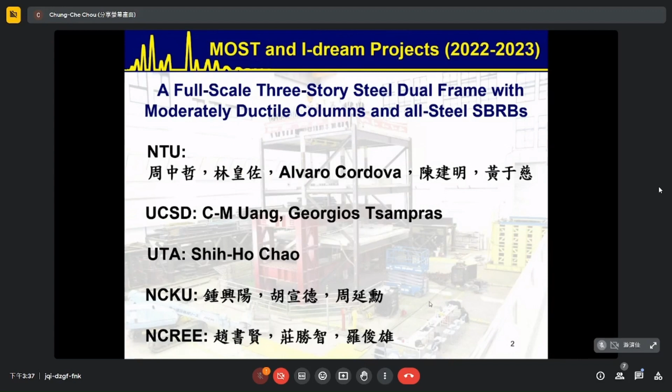Because if you are familiar with the AISC seismic provision, which is a US code on steel, they have the 2016 version and also the 2022 version. Particularly, we are looking at the changes for the column. For example, in 2016 it requires the column B/T ratio. In Taiwan, we are using the rectangular column, so the column has a width and a thickness.

So in the code, it requires a minimum width-thickness ratio to meet the highly ductile member requirement. What does that mean, highly ductile member? That means when the building is under earthquake, this member will go through very significant inelastic deformation. We call it a highly ductile member.

But how about the moderately ductile member? That means in a very strong earthquake, it only gets very minor inelastic deformation. So you can see this B/T ratio is almost doubled.

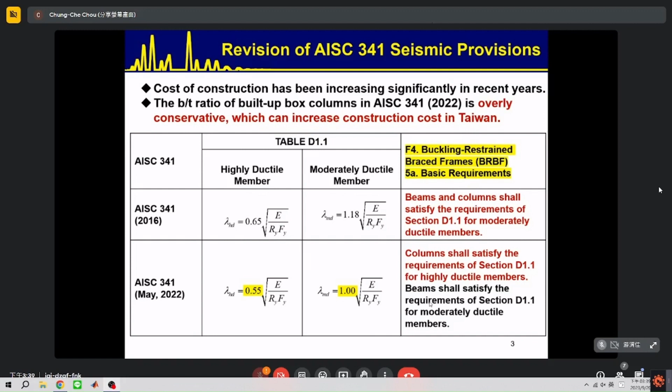But in the 2016 to 2022 version, it's become more stringent. Particularly in the older version, it requires that we can use a beam and column satisfying only the moderate ductile member requirement. But for the 22 version, the beam and column should be designed by this, not by this. So you can see the value reduced by half.

That means your thickness will be doubled if we follow this new version of AISC seismic provisions. So this is very strict and over-conservative. So I did this research to talk about this.

In order to do this, we basically designed a three-story frame with one special moment frame and the other a buckling restrained brace frame. So you can see this b/t ratio based on Young's modulus and material strength gives 22 for the moderate ductile member, and our column basically satisfies this. b/t is very close to the requirement of a moderate ductile member.

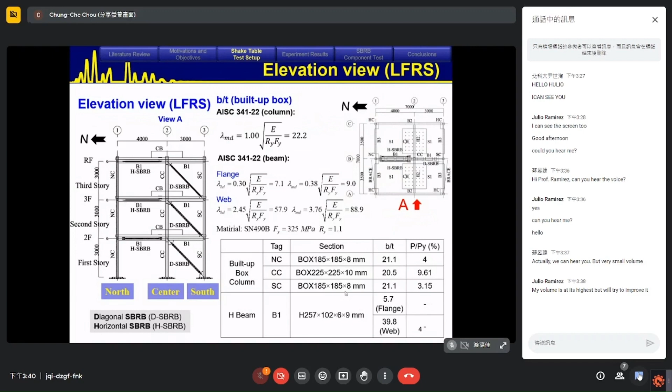But as you know, Taiwan is in a high seismic area. Basically we should follow the stricter requirement. But in this case, we try to use this less ductile column to see how it performs in shaking table testing, because that's a BRB, the buckling restrained brace frame.

So this is one of the BRBs we used in our testing. Basically we have what we call the core, the center core, to take the actual force. But as you know, when the plate is under compression, it's very easy to buckle, right? So we put the so-called restraining member, that's all the blue part, and use bolts to sandwich them together. So this is how we do it.

Usually, in a very popular way, they put concrete inside in order to get more rigidity. But in our case, we use pure steel without putting any concrete inside. So that can save about 50% of the construction labor and also save a lot of money.

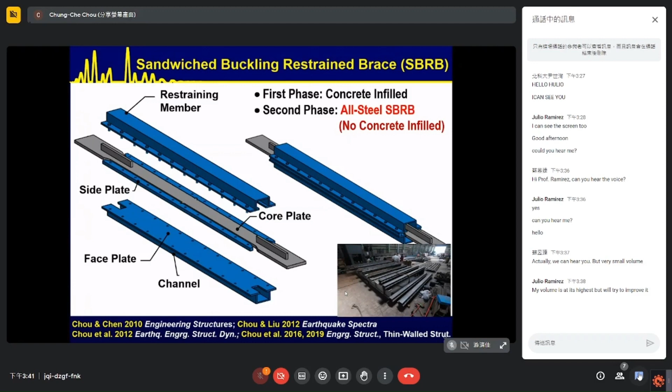So this is one of the testing we conducted. You can see we have a 15-meter high reaction wall in our Taipei lab, with 5 actuators, each one with 1,000 kilonewton capacity. So we put the SBRB over here.

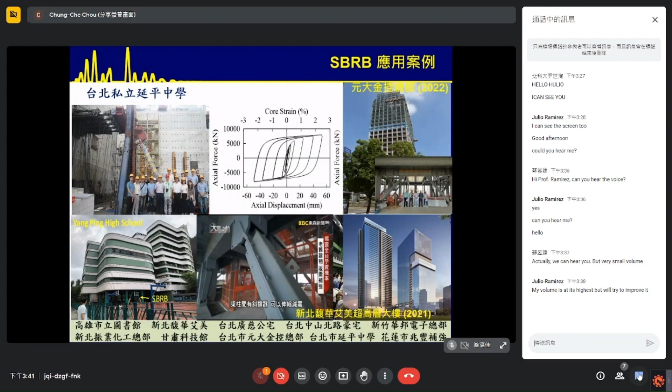This shows the axial force versus axial displacement response. It's very stable up to 2.5% axial strain, that's about the maximum considered earthquake level in Taiwan. So this has been used in many buildings.

For example, one probably just 10 minutes away from here, this is a bank headquarters, and this is Yanping High School, also about 10 minutes' drive from here along Jianguo Nanlu.

And there is also the highest building in New Taipei City, a 45-story residential building. They use more than 800 SBRBs for seismic resistance.

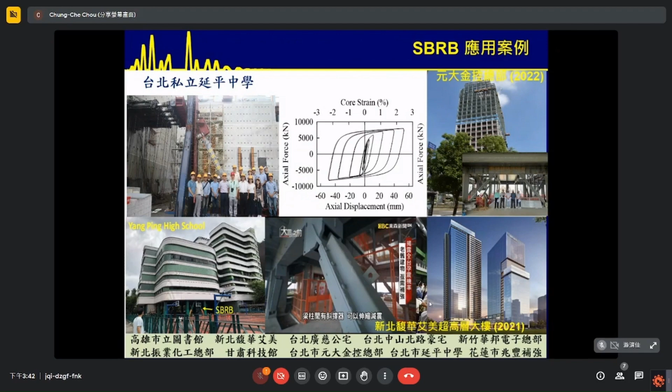So this is one of the testings for this high-rise building. You can see this is without filling any concrete. So under tension and compression, you can see here, the member performs very well. It reaches a capacity of 7,000 kilonewtons in compression and 6,500 kilonewtons in tension. So the performance is very stable.

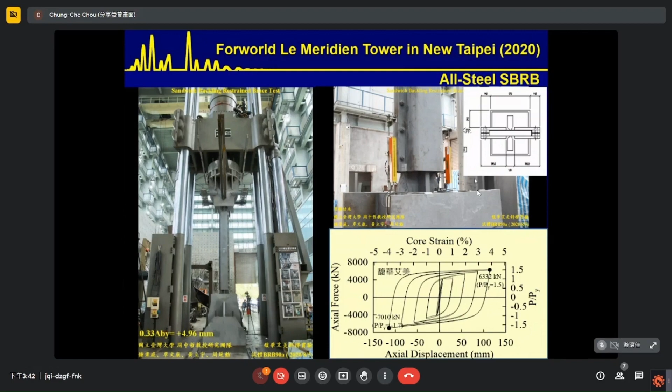In addition to that, this is one retrofit project. This is a very old building, 30 years old, located on the eastern part of Taiwan, in the Hualien, Taitung area, the most beautiful area in Taiwan. So if you have a chance, please take time to visit the east coast of Taiwan.

In addition to SBRB, we also use our research funding to develop a different type of brace. This is one of the largest braces we are testing. If you look at this force deformation relationship, it's totally different than the BRB because there is no force deformation in these two corners. So we call this the self-centering brace.

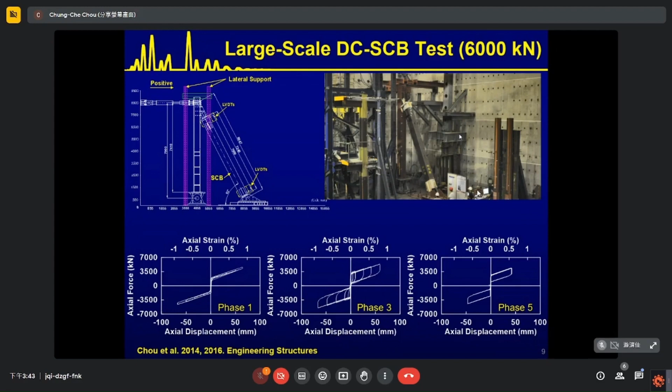It means when the loading is unloaded back to here, it has no residual deformation. So this brace can provide energy dissipation and also reduce the residual deformation to a structure. This one is without an energy dissipation device, and this one is with an energy dissipation device. That's what we are testing in our Taipei lab.

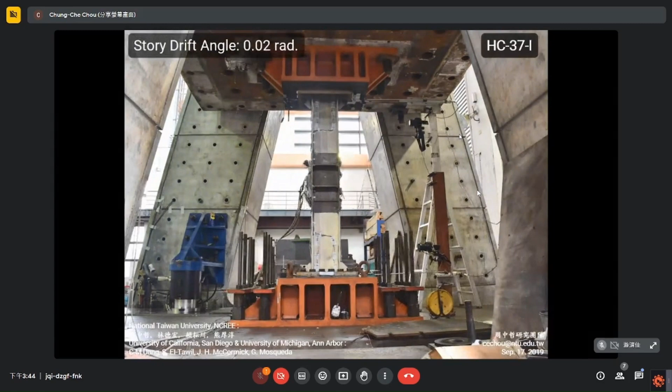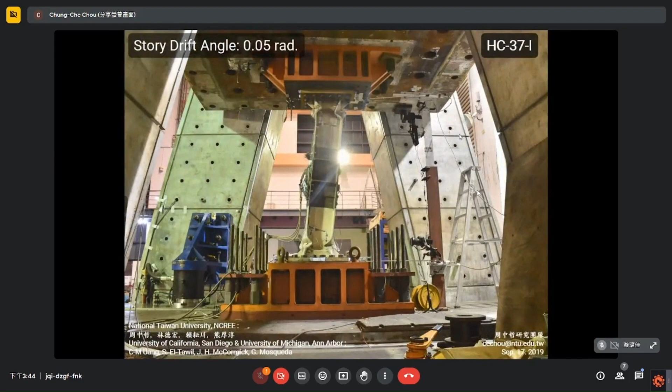In addition, in our Taipei lab we have a MATS facility. In this case we test the column, so we can apply more than 10,000 kilonewton axial load. We also have a horizontal actuator to apply 4,000 kilonewton capacity. So during the axial load and the lateral load, you will see the buckling and shortening of the column in this facility in the Taipei lab, which we call the MATS.

So that's the current single column testing. But as you know, the column is connected to the second floor beam and also the second story column. In this particular collaboration between UC San Diego, Michigan, Ann Arbor, we are trying to incorporate the boundary condition between the beam and the column to simulate the real boundary condition in the building.

So we take this portion, this is the column, second story beam, and third story beam. We put the lateral support to make sure the beam does not have lateral torsional buckling. This is our actuator, placed here, here, and also here. So we use three actuators to do this very complicated testing. I think this is the first very complicated testing for the column to simulate the real boundary condition in the building.

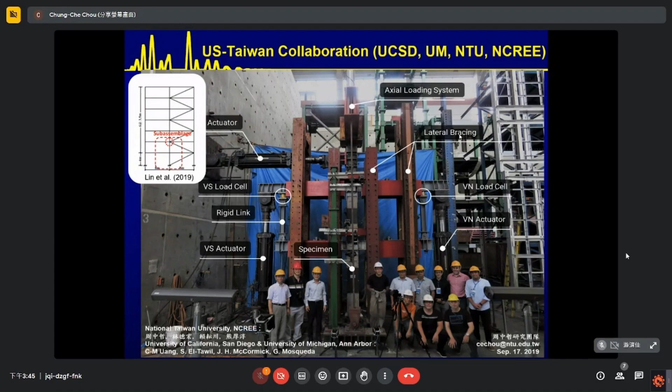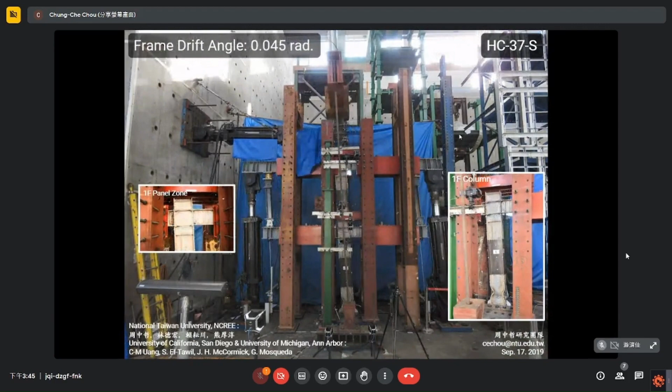Let me show you one of the videos here. If you look here, we also apply the axial load, then we apply the lateral load. During this moment of axial load, you will see the buckling here. Once the buckling occurs, the column will shorten, so these two actuators need to follow the shortening of the center column to make sure all the axial force can go through the center column. That's how we conduct this testing in the lab with UC San Diego, Michigan, Ann Arbor.

That's all the facilities in our Taipei lab. In the Tainan lab, we have one big shaking table in Taiwan. The table dimension is 8 meters by 8 meters, and the payload capacity is 200 tons, which means we can put a 3-story full scale building model on it.

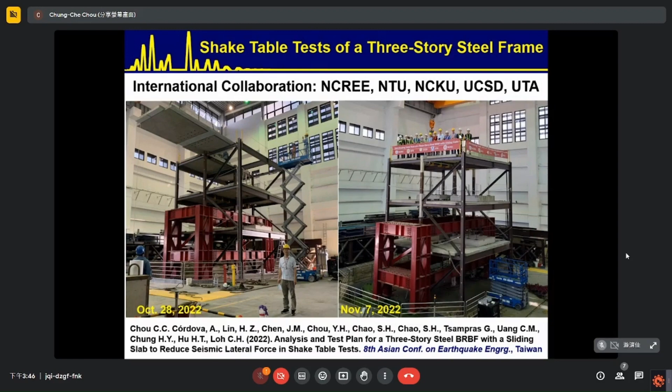As you can see here, this is a steel dual frame system, and in this particular case we try to use a precast slab. Basically the slab is manufactured in the shop, then we just use the energy dissipation device to tie the slab to the building frame in order to speed up construction at the site. That's how we try to investigate the behavior of this precast slab on the building performance.

So this is how we construct this 3-story, 9-meter high frame in the lab. This is our shaking table, and this is our frame. The center frame takes the earthquake resistance, so we assemble everything here at 9 meters high. Then we put the perimeter frame there, then we put the first story slab, second story slab, and the roof, and we put the concrete mass over there.

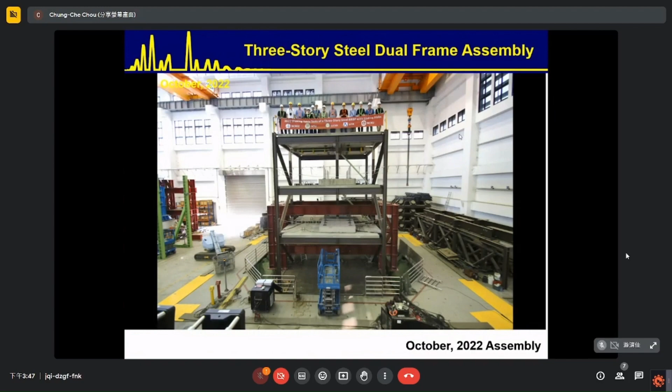During this testing we try to only input one directional loading. For this particular loading, we use the ground motion we recorded from last year's Chihshang earthquake. If you read the news, there was a big earthquake on the east coast of Taiwan, magnitude 6.4. On the first day the epicenter was over here, then on the second day, less than 24 hours later, we got a second epicenter with another big earthquake.

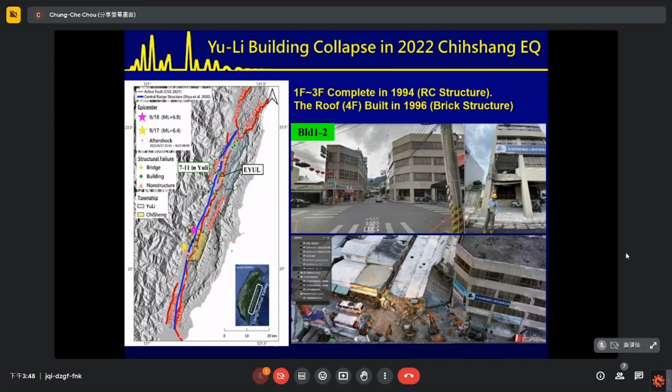So then we have one building. Since this energy propagated from south to north, we see some damage over here. In this particular earthquake, we had two bridges totally collapsed and also two buildings totally collapsed, but several hundred buildings were damaged. For this 7-11 building, that's before the earthquake, then after the earthquake you can see this 3-story building collapsed. We also have an accelerometer station about 1 kilometer away from this damaged building, so we use this ground motion as our input to see the damage to this new building.

In addition to the building collapse, as I mentioned, there were 2 bridge collapses. This is an almost 40 year old bridge on the East Coast, and you can see the red line represents the faults. All the faults on the East Coast run from south to north, but our bridge runs from west to east. When this earthquake happened, it activated the fault to move from south to north, and that's how this old bridge fell down without forming the so-called plastic hinge at the column base.

So that's the Yuli station. We recorded this ground motion. PGA is 549 Gal, about 0.5 G, and the peak ground velocity is about 69 centimeters per second.

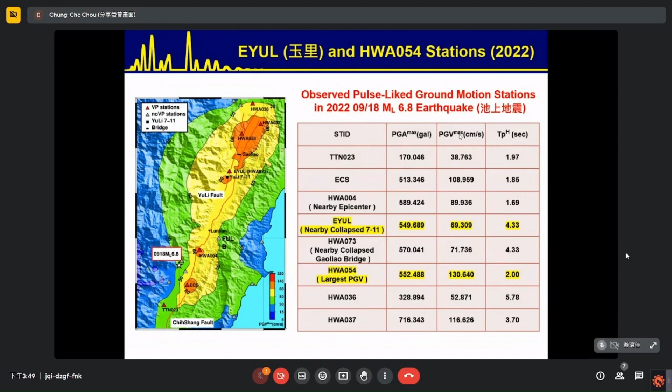This is a forward directivity pulse ground motion. You can see for this Yuli motion, when we draw the response spectra, that's the blue line. Without doing any scaling, it's very close to our design response spectra, called the DBE line.

We also collected 20 other motions. When we average them, this average line is very close to our design spectrum. That's why we use this motion without any scaling for the DBE level.

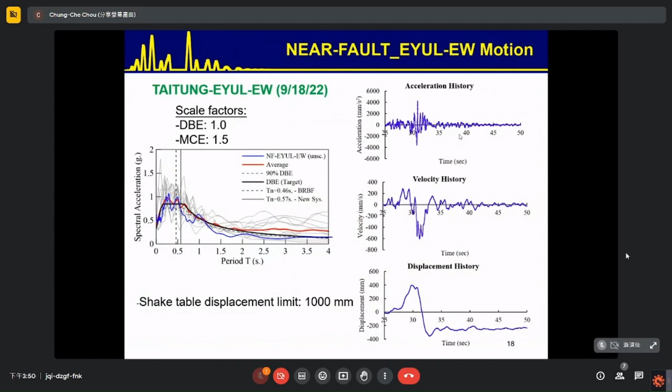That's how we recorded the motion. You can see this velocity pulse in this 30 to 35 second ground motion, and there's a residual deformation. For this shaking table testing, we have two phases. In phase one, the slab can move freely with the earthquake resisting frame. In phase two, we tied the slab rigidly to the frame to simulate the original traditional building response.

For test phase one, PGA ran from 0.031 G to 0.6 G. For test two, we ran up to 1.05 G. Our structure period is 0.5 to 0.6 seconds.

For this three-story building, we have almost 570 channels to measure strain and deformation, and we also use a mocap system to capture displacement.

This shows the pseudo spectral acceleration. For this Yuli motion, that's the blue line. For our test 7, you can see the intensity is already beyond this Yuli original motion.

Then test 8, we ran up to test... this is about 2.5 times larger than the Yuli motion at the 0.5 second period, which is the fundamental period of this building.

There's also something called IP, the ground motion power. Basically it's the energy divided by time, measuring the instantaneous power delivered to the building, which is related to high damage to the building.

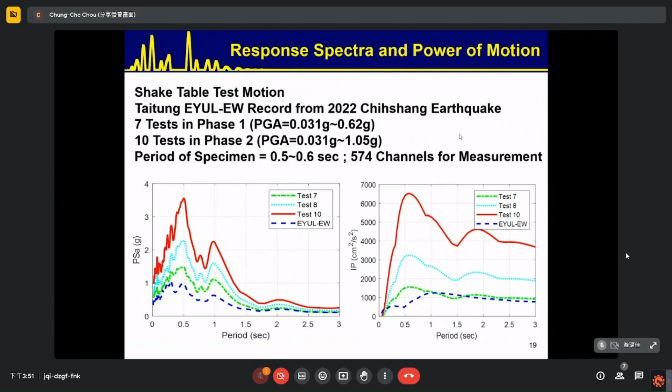You can see for the original ground motion table, this is the power intensity. For our tests 7, 8, and 10, it's very large. That means when we run the test to 7 or 10, it's already beyond the earthquake intensity we recorded last year.

Since there are 17 tests, because of time, I'll just show you test 10 in phase 2.

Let's look at some detailed responses for the SBRB, looking from the inside at the beam-column connection, the column base, and also this—let's see if you can see this.

You can see during the pulse motion, there's a big compression on this SBRB, but no buckling occurred. This shows a connection, this shows a column base, and this is a reduced beam section for the beam.

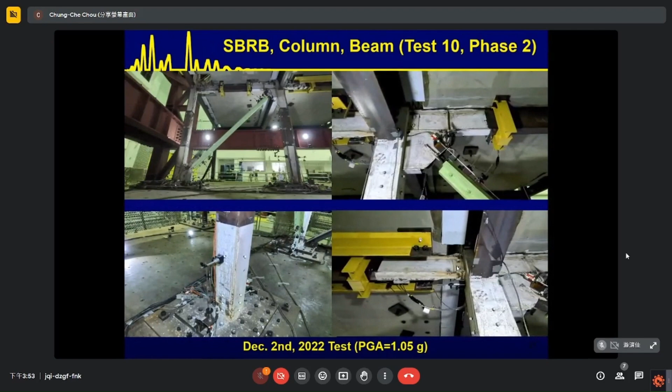I'm sorry, there should have been some noise. We recorded the displacement from test 1 through test 10.

When we run to test 10, there's a big residual deformation of about 0.5%. At 0.5%, if the building is 3 meters high per story, that's roughly 1.5 centimeters of residual deformation.

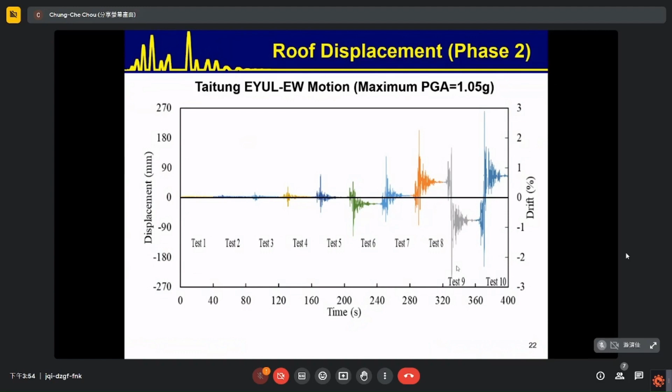In order to act on more motion, we reverse the motion to the other direction. We bring it back here, then run another test into here, so that goes like this.

So the important thing is to see this: in phase one, the slab can slide relative to the frame, but in phase two, the slab cannot slide, right? So what's the impact to the building?

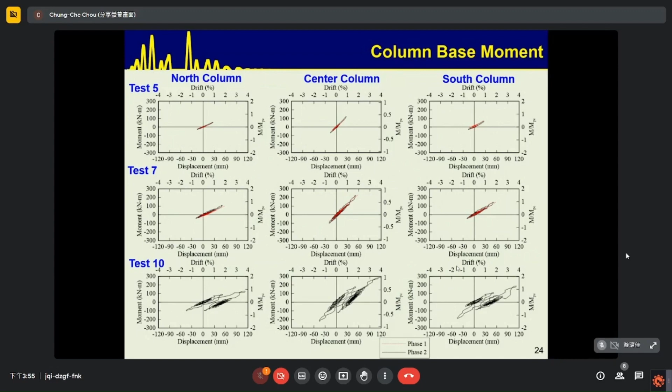Then this shows the north column, center column, and south column, test 5, test 7, 10, the moment versus displacement response. So you can see at 4% drift, we don't see any strength degradation for the column.

Then after testing, we remove one of the SBRB to put in the other machine. We have a 5,000 kilonewton uniaxial tensile compression test machine here, as you can see moving around here. So we do the two-phase testing.

One is the standard cyclic loading testing. The other phase uses the data we recorded from the shaking table. So we use that displacement input to this test machine to record the force. Then we know what's the force versus deformation for this brace when it was in our 3-story frame in the shaking table.

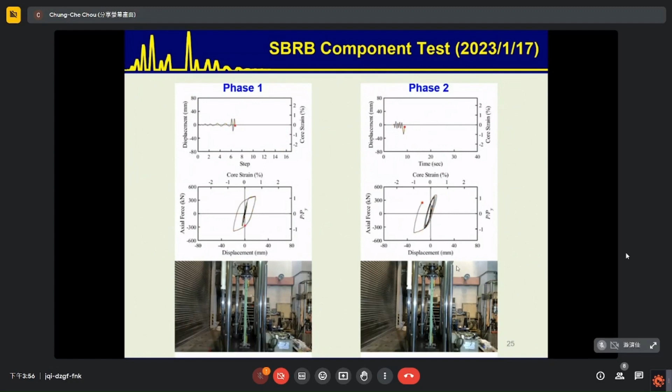So we use this to measure the response compared to the response we obtained from the shaking table, because during the shaking table testing we need to do data reduction.

So basically, we use a strain gauge to measure the column strain in order to calculate the column shear force. Then we have a total shear force, so we subtract this column shear in order to get the brace shear force. So that's why, when you see this, the two lines are very close - that means our data reduction is reliable.

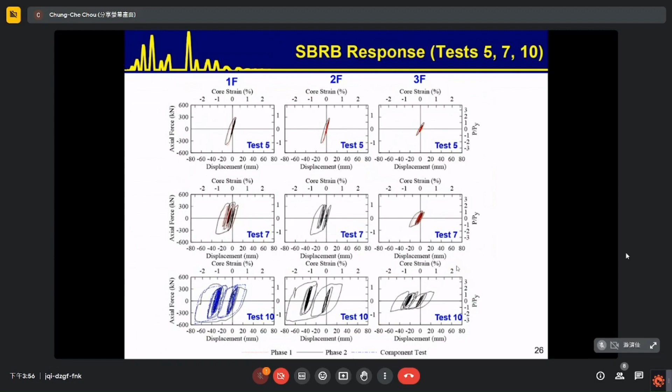So if the column is strong enough, we use a moderate ductile column, which can resist the very strong earthquake. That means the current AISC seismic provision is very conservative for the rectangular box column.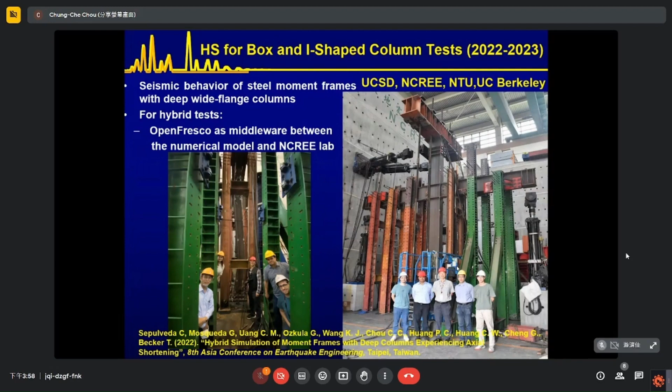So in addition to that, my colleague will present you our work. We also use our testing facility to do a hybrid simulation for the box column and I-shaped column with UC San Diego and also Berkeley to do the model updating for this hybrid simulation. He will talk about it later.

Then I will use this last slide to mention to you, we have a vision to build a new lab, the third lab for NCREE. The new laboratory will focus on green energy, because as you know, we are going to build more than 1,000 wind turbines along the west coast of Taiwan.

So therefore, in this new lab, the height of the building is 15 meters with a dimension of 50 by 50 meters. So we have two very important facilities for this new lab. One is...

a 480 G-ton centrifuge. I think this centrifuge will be very high capacity, because in Taiwan now we have a very old centrifuge - the capacity is only 100 G-ton, which is already 30 years old. Now our government, our Ministry of Science and Technology Council, wants to support us to get this very high capacity shaking table for this centrifuge.

In this case, we can get the soil condition from 70 meters deep below the water level in order to study this soil property.

In addition to that, we also try to build a facility to test wind turbine blades, either statically or dynamically. The length we are proposing for this testing is up to 40 meters long.

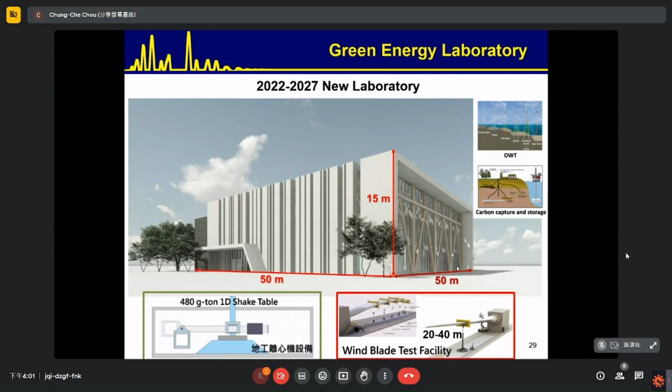Let me introduce myself. I'm Yohsuke Kawamata, working at NIED Japan. In the program, my title is listed as senior researcher. I guess nobody cares, but let me clarify - my correct title is chief researcher.

Today I want to introduce NIED's large-scale research infrastructure supporting transformation to a resilient society. In the first part of my presentation, I will introduce three large-scale testing facilities: E-Defense, the large-scale rainfall simulator, and the cryospheric environmental simulator. In the second part, I want to suggest something about constructing a network of large-scale testing facilities.

As you know, Japan is a country with various kinds of natural disasters, including earthquakes, tsunamis, volcanic eruptions, landslides, windstorms, typhoons, floods, and snow and ice disasters. The National Research Institute for Earth Science and Disaster Resilience, NIED, is my facility. NIED conducts lots of research with the basic goal of realizing a disaster-resilient society.

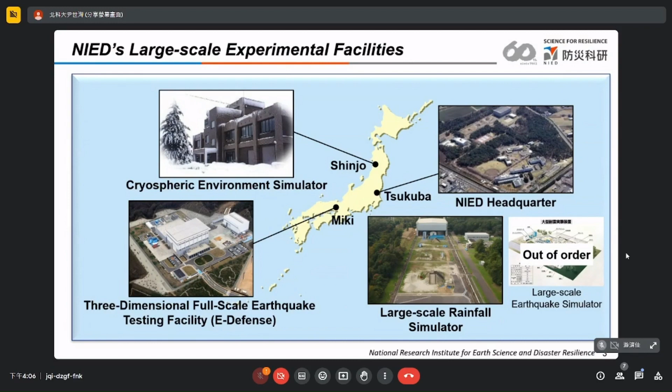The large-scale rainfall simulator in Tsukuba is a very large facility, though I never watched testing in real time. This rainfall simulator has a very wide testing area, about 3,000 square meters, where we can place large-scale specimens. We can simulate very heavy rainfall, adjusting intensity from 15 to 300 millimeters per hour. In Japan, the maximum rainfall intensity on record is about 187 millimeters per hour, so this simulator can simulate about 1.6 times more than the Japanese record.

This rainfall simulator is movable, so we can prepare several specimens at the same time, saving time to perform more experiments.

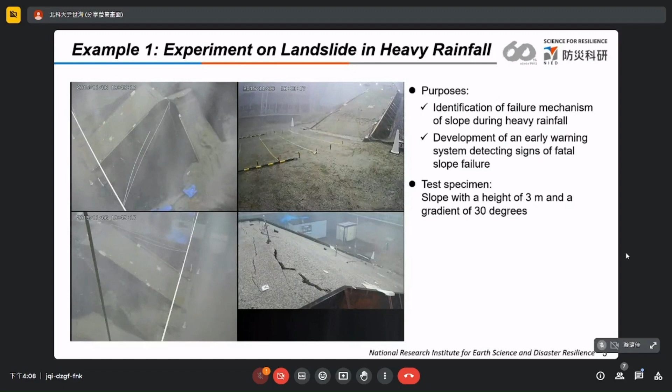Let me introduce some test examples from the large-scale rainfall simulator. Various types of sensors are installed in the slope, and we try to identify the failure mechanism of slopes during heavy rainfall. We try to develop an early warning system to detect the first sign of fatal slope failure. The slope height is 3 meters with a gradient of 30 degrees, and you can see the fatal failure of the slope.

The next example is verification of structural resistance against impacts from landslides. In Japan, there are many houses in landslide danger areas, so we observe this kind of damage many times. This movie doesn't have sound - we built a very high slope, about 12 meters, and poured 1 meganewton of soil to build the slope. Let's see that again.

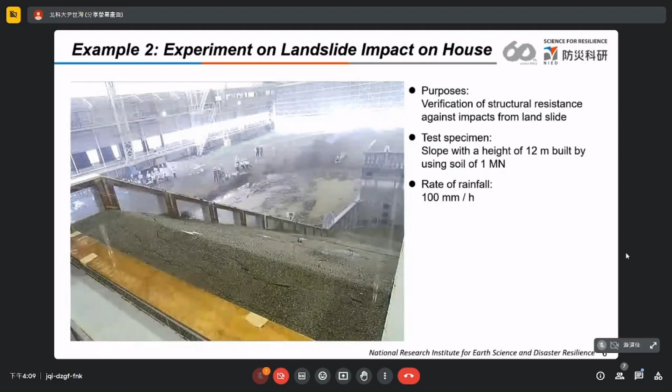Oops, just a moment. Oops, what happened? That's fine. Okay, if you are interested in this movie, I will show you after this session - please stop by.

The next large-scale testing facility is the cryospheric environmental simulator, used to simulate any kind of natural disaster under cold weather. This facility has lots of devices to simulate natural disasters in cold weather, including two snowfall machines, a rainfall machine, a solar simulator, a wind tunnel, and a blower.

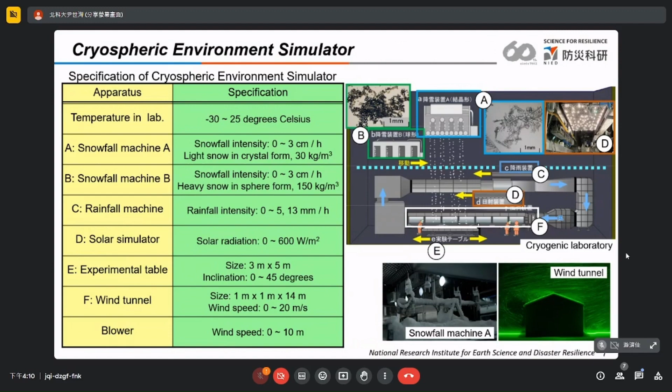Let me show the first example of testing in the cryospheric environmental facility. The specimen is a special device, an ultrasonic anemometer. Even under heavy snowfall, this kind of device needs to keep working, so we test continuous usage of this special equipment under very heavy snowfall using this snowfall simulator.

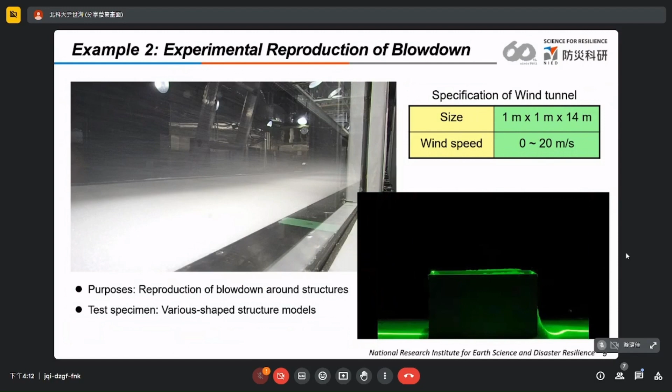The next example is testing of the wind tunnel with a snowstorm - it looks like this. We place some small-scale structure models and can reproduce blowdown and snowstorm conditions, so we can find good solutions to this kind of disaster.

And the last one, e-defense. I'm working here, so I can explain a little bit more than the other facilities. So e-defense is, let me say, one of the world's largest shaking tables.

The area is like 20 meters by 15 meters, and payload is like 12 meganewtons. This shaking table is a 3-dimensional shaking table, and there are 24 actuators, each controlled independently. So we can input rotational movement. We call this a 3-dimensional, 6 degree of freedom shaking table.

The construction cost of this gigantic facility is like... 450 billion Japanese yen. No wait, what is billion? It's 45 billion Japanese yen. I'm sorry, but it costs a lot.

We had a big motivation: the 1995 Kobe earthquake. We made lots of experiments, but then we had another project after the 2011 East Japan earthquake. Originally e-defense was designed to simulate any seismic motion recorded in the Kobe earthquake, so we needed to upgrade e-defense to simulate the very long duration motion recorded in the East Japan earthquake.

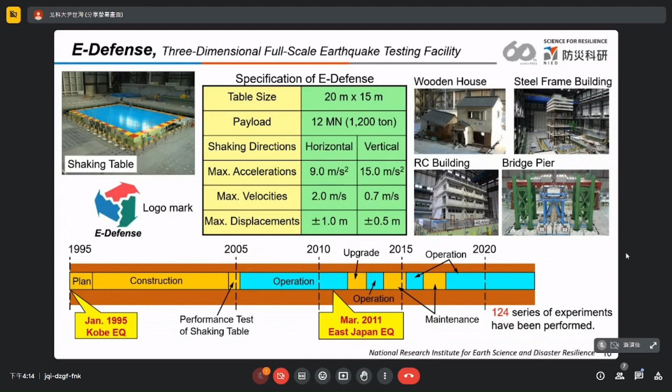After that, we had a big operation, a big maintenance, which cost a lot again. By now we have performed 124 series of experiments, so we have lots of experience with this kind of large shaking table test.

To perform this kind of large scale experiment we need big money, because the construction cost of specimens is very, very expensive. We have to dispose of specimens, and operation costs like electricity and gas are getting higher and higher. So it's very expensive. 15 years ago, we could find big funds relatively easily to reproduce the great Hanshin-Awaji earthquake disaster.

Because we observed lots of fatal damage to old buildings in the Kobe earthquake, we made lots of research about seismic evaluation and retrofit for existing buildings. But these objectives are kind of past objectives now.

Now we are researching indoor safety, because furniture turnover killed lots of people, so we have to keep people safe inside rooms. We are studying these kinds of things.

Real-time assessment of structural damage status is, I think, one of the very popular topics now. And functional maintenance of structures and business continuity is another.

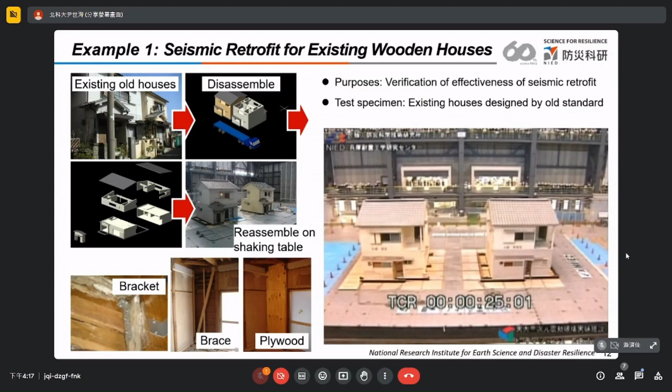Let me introduce some test examples at e-defense. Unfortunately we checked and this movie doesn't work because it's quite old, so let me skip it. If you are interested in this movie, I will show you after this session.

The second example is functional maintenance of a wooden residential house. We built two full-scale houses, typical houses in the Tokyo metropolitan area, very narrow, built on very narrow land. One is seismically isolated, and the other is a house built on soil with some sewage pipes.

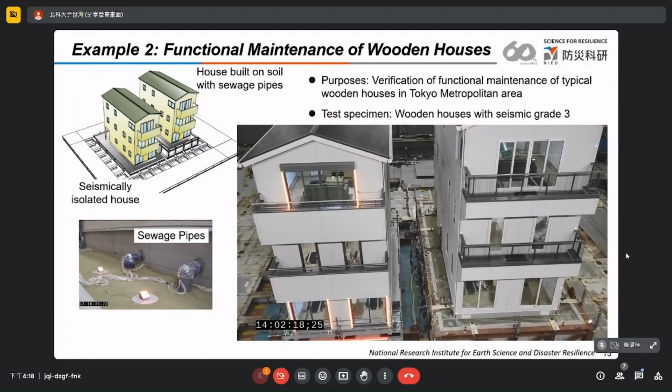Both houses are seismic grade 3, meaning their seismic performance is 1.5 times greater than the design code requires. I think grade 3 houses are getting popular in Japan.

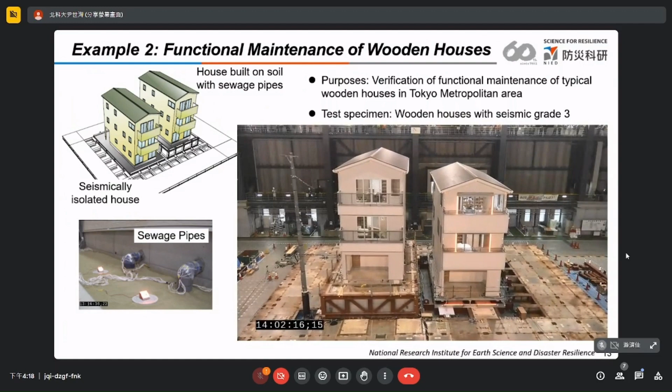A stronger house is rigid, of course. In general, seismic energy is dissipated by deformation of the structure. But because of the rigidity of this house with seismic grade 3, it is likely to slip. So because of large significant slippage, the sewage pipe will be fatally damaged.

This means the structure itself is still fine even after a big earthquake, but the house loses its function. When the sewage function is disrupted like this, we cannot take a bath, cannot take a shower, cannot cook, so we cannot stay in this house. The function of this house is completely lost.

The last example is real-time assessment of structural damage. We built a 10-story steel frame building with an external curtain wall.

So we replaced 4 lines of LED light along the building. You see three lines, a red line and 2 green lines. This light color indicates the damage status of each floor.

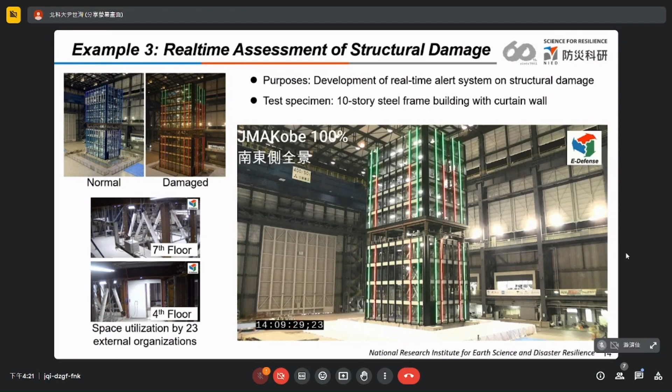In this test, 23 external organizations used space inside of the structure. I think from Taiwan, the NCREE team and National Cheng Kung University team joined in this experiment. They installed some ducts and facilities in this specimen.

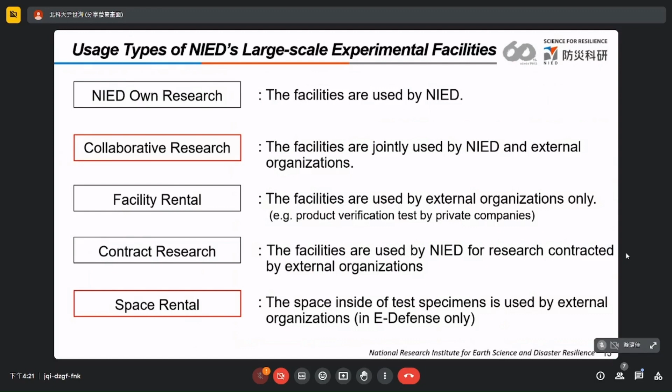So let me move to a suggestion for constructing an effective network of large-scale experimental facilities. We are always expected to obtain research results appropriate to the research funds invested. I want to play with these big toys with no care for sponsors, but we cannot do that. So we have to think about that.

As I mentioned, large-scale experiments cost a lot. For example, one E-defense shaking table test costs like 100 to 300 million Japanese yen. It costs a lot, so we have to obtain results with big impact matching such big funds. We need to think about research results with big impact to disaster risk reduction.

Recently, advanced technology like digital transformation is required to be used for disaster risk reduction in the future. There are many factors affecting disaster risk, and the combination of these factors is infinite. So we need a vast of evidence under various conditions to verify that kind of advanced technology.

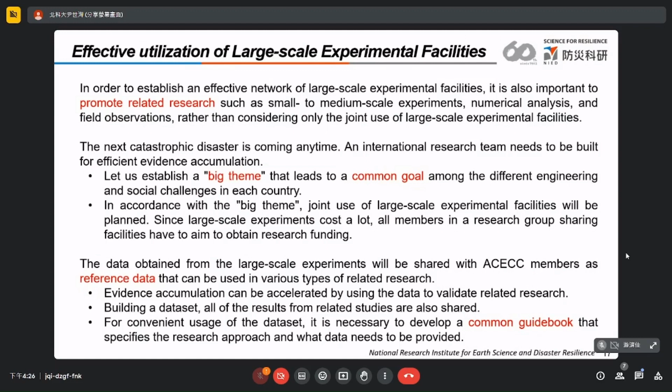So we have to build a data set - all the results from large-scale experiments and related studies will be shared. For convenient usage of this kind of data set, we have to develop a common guidebook that specifies a research approach and what data needs to be provided, or something like that.

Let me summarize - I think my time is over, but let me summarize. In establishing a network of large-scale experiments and joint utilization of large-scale experimental facilities, I believe we have to discuss various types of related research at the same time.

So let's look for appropriate big themes which lead to common goals, and large-scale experiments can provide reference data. By constructing the data set, the large-scale experiment and all related studies will be shared for anyone in ACECC members, and any researcher can make evidence-based verification. This verification and validation process can improve the quality of the data set, which can also be utilized to validate and improve the accuracy of advanced technology for disaster risk reduction. I believe it's one of the most important roles of a large-scale experiment.

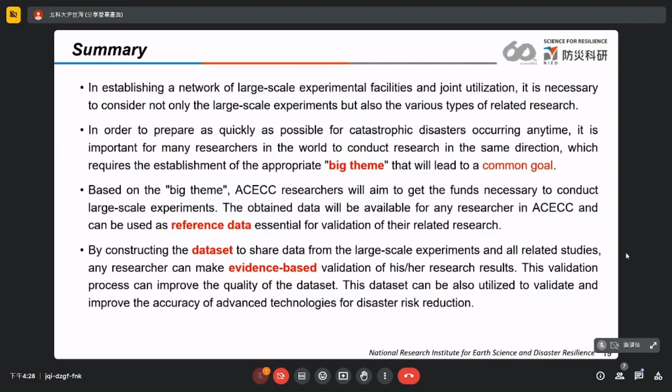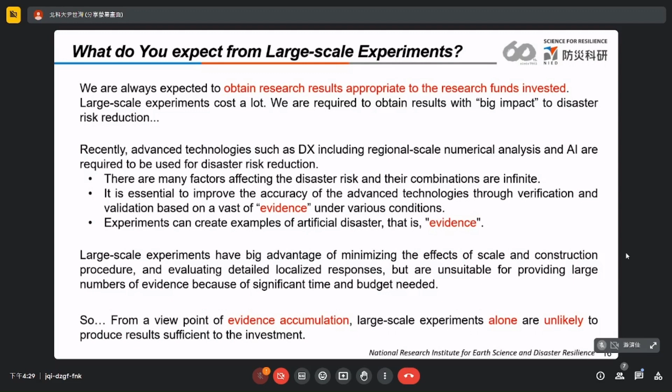Yes, good afternoon, can you hear me okay? Give me a second. You need to share your screen. Don't you have to stop sharing? Tell me if you can hear and see my screen now. Thank you, yes, perfect, I can see you.

So, good afternoon everyone, it is my pleasure to be here today. Yes, I can see it. So you will be advancing the slides then, is that how you want to do this? Okay, so you tell me when we're ready and I'll start. Yes, you may start. Perfect, thank you, and sorry about the technical difficulties.

So I'm here to give you a brief introduction, and some of you are familiar with it, to the Natural Hazards Engineering Research Infrastructure funded by the National Science Foundation. In the context of this committee's activities, I think it will touch on some aspects already discussed, so I'll try to be brief but emphasize the importance of some of those aspects in looking forward to our collaborations. Let me please go to the next slide.

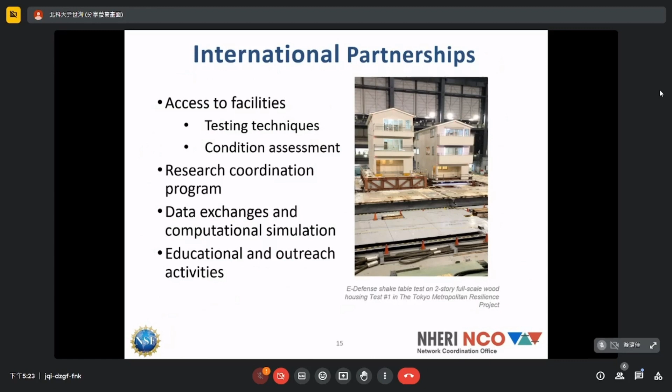If I may have the next slide, I can show an example of this research collaboration in 2019, which is when I think this shake table test was conducted. Next slide, please.

This is 2018-2019 effort. Researchers from three different awards received by NSF went to eDefense, and during the testing, they were focused on collecting new ways of collecting data using LiDAR and various other forms of measurement.

They were supported by the post-event reconnaissance facility of NHERI, the RAPID facility. You can see the logo there. And this has already led to data being posted in the repository, as well as publications. You can see in the slide towards the bottom, the DOI associated with that data.

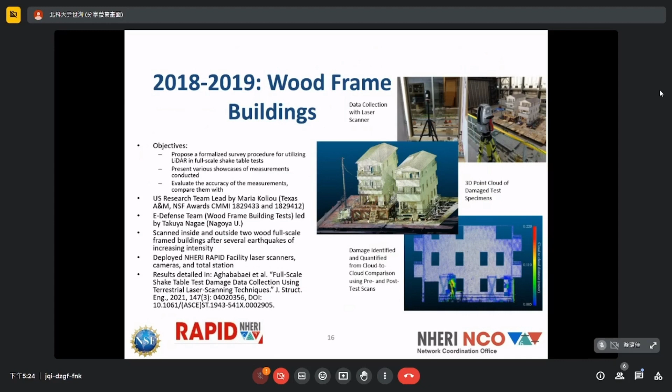This is available not only to US researchers, but also to our partners from Japan. In this particular test, it was led by Professor Nagae from Nagoya University. May I have the next slide, please?

Thank you. And to conclude, basically our presentation is—I cannot overemphasize the importance of that research getting to practice. This is one of the key activities in NHERI, which is to promote the accelerated transfer of research to practice.

We have a committee which consists of professionals in the area of tech transfer in the various aspects of NHERI work, and they work with our researchers from the beginning to make sure that in their projects they consider the possibility—I'm not saying every research project leads to immediate transfer of that technology, but at least to have it in mind and also to bring practitioners into the team, which from our perspective are the end users of our product.

So with this, in the interest of time, I will conclude my presentation and thank everyone again for this interesting session, and look forward to working with you in making this reality of worldwide, or at least global, type research collaboration. Thank you.

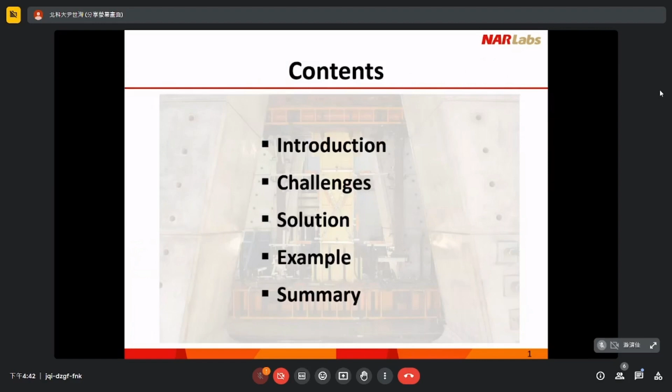In NCREE, we have two centers, one in Taipei and the other in Tainan, in southern Taiwan. In Taipei, we have a shake table, and another testing area we call the reaction wall and strong floor system. We also have a dynamic system that allows us to perform dynamic tests on full-scale viscous dampers. It is single degree of freedom, but it has 200 tons dynamic capacity.

And we have MATS, the multi-actuator testing system. It's actually a 6-degree-of-freedom system that allows you to apply realistic boundary conditions on the specimens you want to test, whether it's a small frame, or a component like a BRB, or columns. Traditionally you could drive displacement at the column top, but using MATS you can apply vertical load simultaneously with horizontal displacement. You can also do multi-degree-of-freedom control simultaneously, like with rubber bearings, applying actual load—the maximum load capacity is about 6,000 tons.

In Tainan, we have an even bigger shake table, with a payload of 250 tons. In Taipei, the older shake table has 50 tons payload. In Tainan, the shake table is featured as being capable of providing an earthquake generated from a near-fault source.

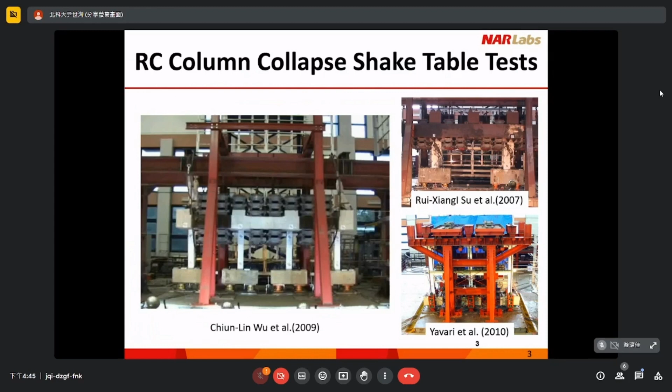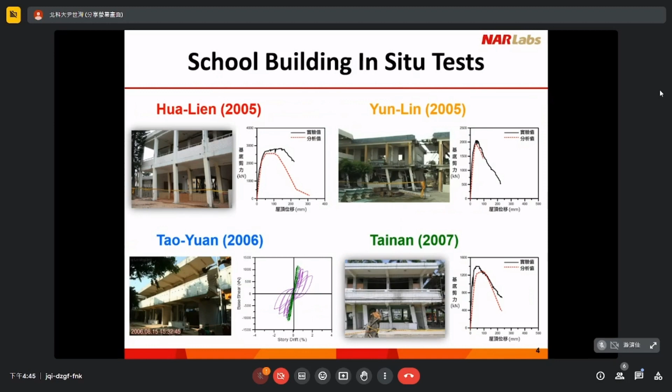And you can see that it's a real building, it's a school building. Before it is totally demolished, we asked the government if we could test it. So we did in situ cyclic tests and hybrid pseudo-dynamic tests using those real school buildings.

Because the target of our study, buildings or bridges, are very big and very heavy, even with E-Defense we cannot test really very big structures. So as the professor mentioned, we need to do a lot of other research. This is one of our efforts in this kind of hybrid simulation.

Hybrid simulation means that we are combining structural analysis and structural experiments together to study the total dynamic behavior of a system.

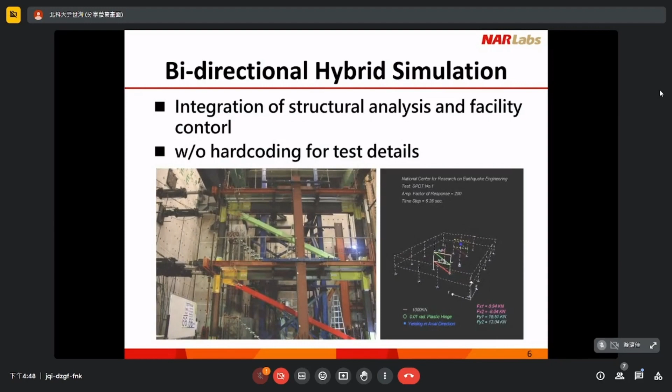By this, we can make use of our testing facilities to study something interesting. And this is another hybrid simulation, a full scale, 3-story full scale brace frame.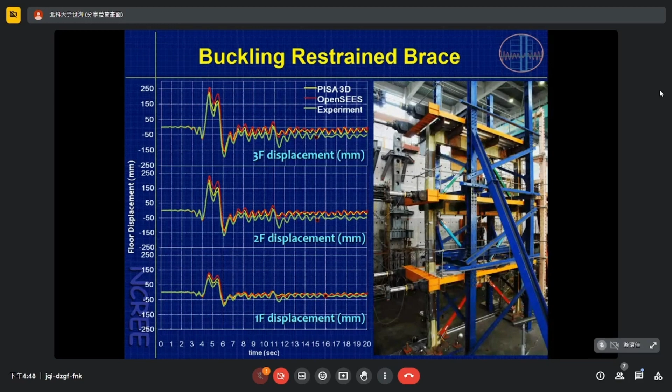I'll just skip it because I do not have enough time.

This is a kind of real-time use of experimental data. When we do testing in the laboratory, we get data and use it to calibrate our numerical model instantly, so compared with traditional numerical simulation, we're conducting simulation on a model which can change its property according to the experimental data obtained in real testing. So that's online model updating, you can update your model when you do simulation.

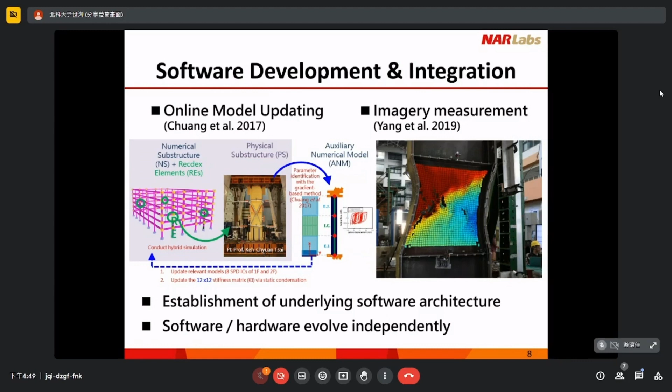We also develop some imagery measurements so we can measure all kinds of displacement and strain field responses during our tests. And we also develop online display systems to facilitate remote participation and international collaboration, so when we test in the laboratory, we can immediately show real-time data on the website. Anyone with the link can see the results immediately, even if you're in the United States.

So I've already shown you some of the testing events or activities we have in NCREE. You can see that the most important feature of this testing is that they are very diverse. We have different kinds of testing.

But you know, as a laboratory guy, one of my problems is that in the past I always needed to prepare a lot of different control programs and testing software just for a specific test. If there is a test requirement coming to me, I need to write the program, and once the test is finished, the program I've done is useless, and I have to do it again every time a new test comes.

So in this research, we put a lot of effort into trying to develop one general purpose software that allows us to conduct all the tests, almost all the tests we are asked to conduct in the laboratory.

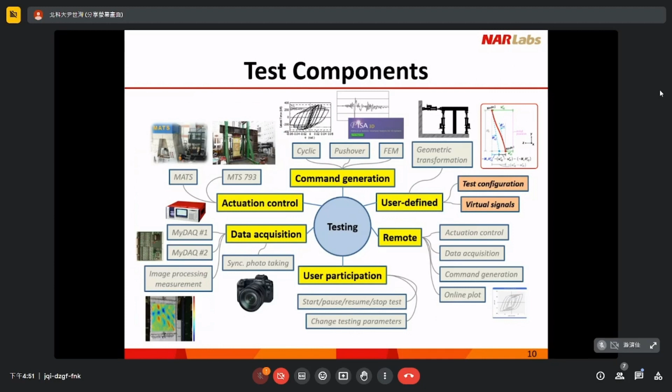The idea is that in testing, there are a lot of concepts, activities, or entities involved, like command generation, actuator control, data acquisition, and so on. We developed software packages that encapsulate all this hardware, software, or human behavior into software objects. After modularizing all the concepts involved in testing, we can combine them together so you can compose what you need based on your test requirement. I'm sorry, I just cannot go into detail inside it.

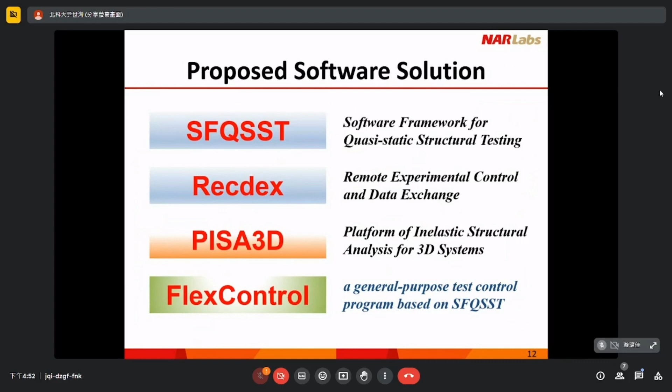So these are several things. We also make use of the internet so we can connect different programs and integrate them so the programs can evolve independently. Some programs are capable of doing structural analysis, while others can control testing hardware like actuator controllers or data acquisition systems. Then we integrate them together with a unique, uniform communication protocol.

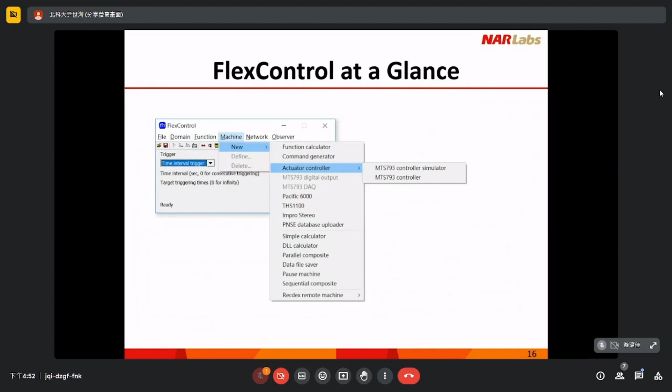Excuse me, how much time do I still have? Five minutes? Thank you. Since I only have five minutes, I cannot go any further, so let me just move on.

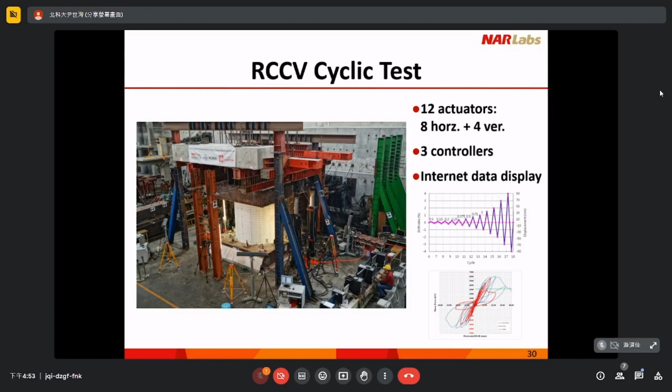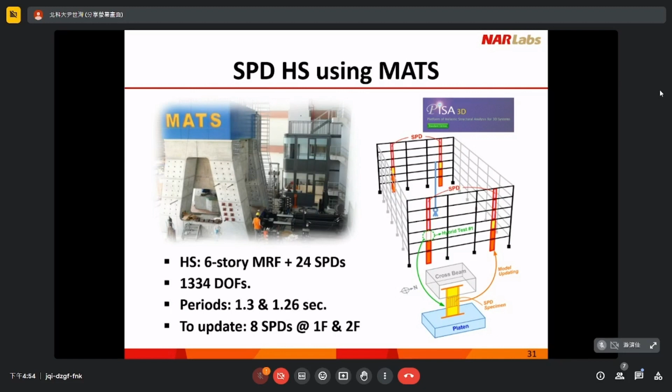So that's real-time simulation. In that test, we had different control modes and resisting force. You can see that in another year we tried this hybrid simulation again, but this time we were not using the MATS system—we used traditional actuators instead. This test and the one I just showed are very similar; we just need to switch the actuator control a bit, and everything can go directly.

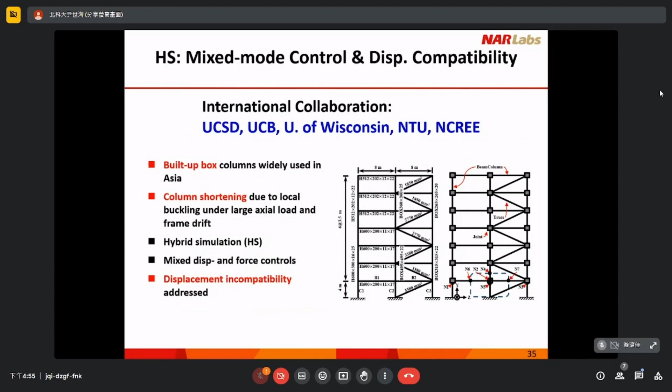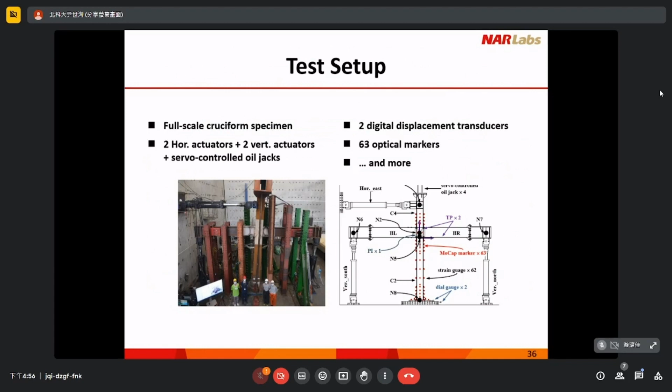Recently we did a very interesting simulation. You can see this is the frame behavior we want to study; however, we only built this part in the laboratory, so this is the part we tested, and for the other parts we simulated. This is the specimen we have: we have actuators 1, 2, 3, and 4 installed, and four oil jacks, so we can apply actual load on our specimen.

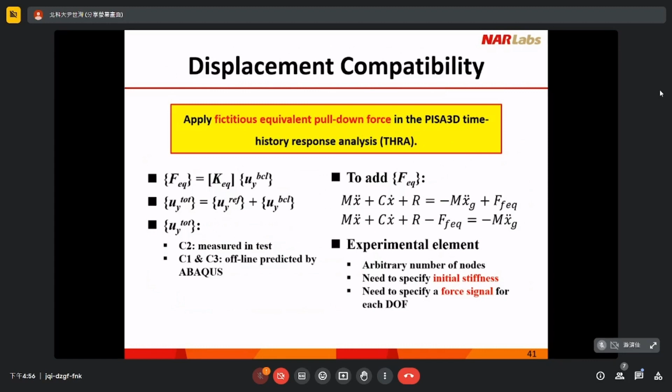We used a very advanced method so we could control the vertical force on the actuator and the horizontal displacement on the specimen. With that test, we successfully captured the column shortening resulting from column buckling in the experiment, and used that data to feed into the structural analysis program so we could get a much better simulation result from this test.

In this test, you can see the test result, and this is one of our achievements here. We used force control for the vertical degree of freedom; however, by using a fictitious force method, we applied a fictitious equivalent pulling-down force such that we enforced the numerical model to have that measured shortening in the column. The test results show that we successfully did it.

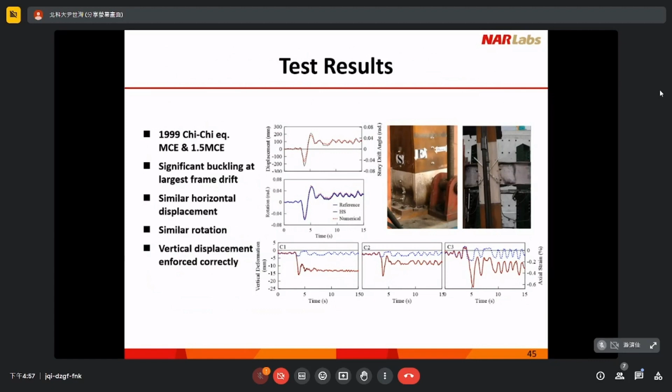I think I have already run out of time, so I'll just stop here. If you have any questions, I would like to answer them later. Thank you.